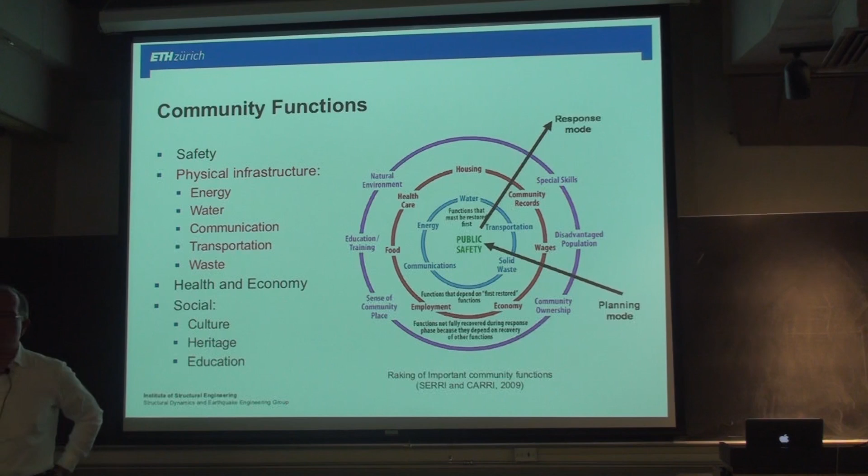But that is one layer surrounded by a few other layers that contain the social and economic life of a community. Here is the one I'm interested in: the layer of infrastructure systems that supply energy, water, communication, transportation, and waste management for our society. This is why we could say that without the functioning of these systems, resilience of a community cannot be realized. These are quite fundamental to the life of a community.

We are going to be facing a situation very soon when we develop these smart systems where, if we're not already doing so, the control and command of such systems is going to be so dependent on telecommunications and computer networks that they're going to be indistinguishable and inseparable. A failure in one may lead to failure in the other, and cascades could happen.

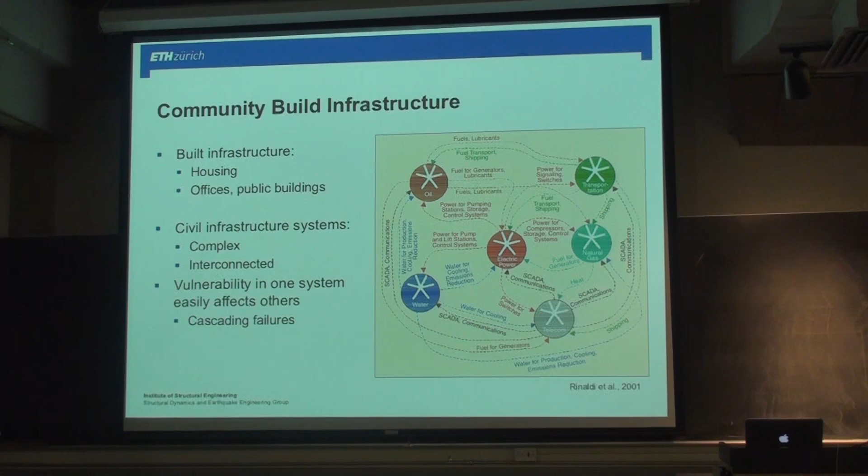This tremendously complicates the engineering of such systems and increases the risk exposure. This is in some sense reality which I think the model I'm going to talk about doesn't yet approach, but at least the hope is that at some point we will be able to deal with a complex system.

This, as far as I know, was first proposed by Michel Bruneau and the folks at MCEER around 2003 or so. Maybe there were some earlier graphs like that.

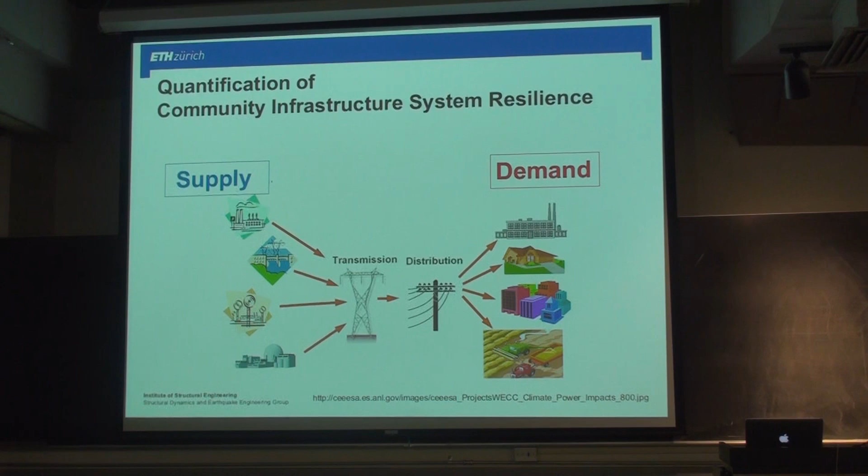So the way I propose to do this is to take the same concept of resilience but separate it into the supply side and the demand side. An infrastructure system that supplies something, electricity for example, will suffer a fairly fast degradation of functionality, then start to recover, probably more slowly. This kind of process we can hopefully monitor and simulate.

And we can do the same for demand. Now the demand comes basically from the people, from the population. What we did is say that demand is somehow proportional to the amount of physical damage to the housing inventory—that includes hospitals, offices, and everything else.

Let's say we have an idea of how damaged the houses are, and with that idea we can speculate how much power they could use, or how much time it would take for people to come back to their dwelling and start consuming power—be it just to charge a cell phone, which is very little, or to use the full facilities of an office, air conditioning, and possibly even a server farm.

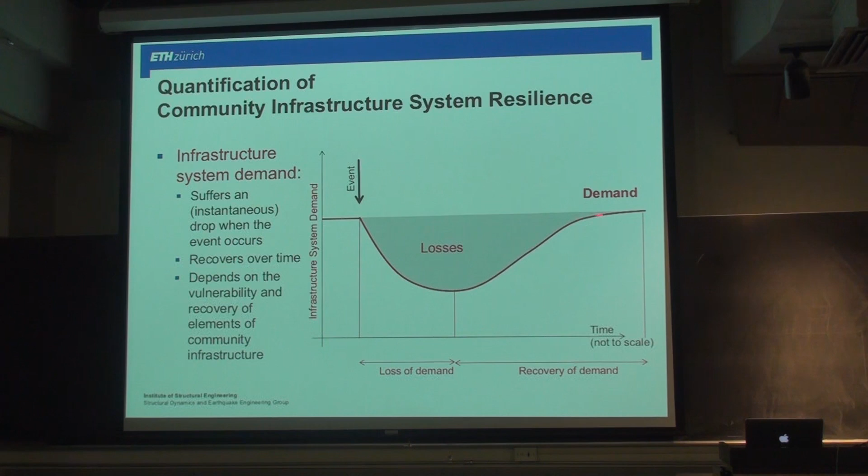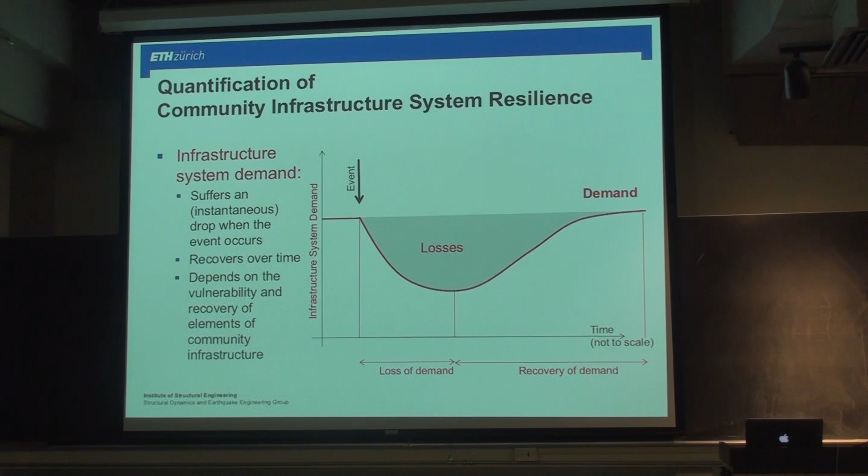So again, there is some kind of drop which possibly lasts longer, and the recovery takes another rate and develops over another time frame from the supply. Overlapping the two, what we can see is that there is a region in time where the supply is not meeting the demand.

The drop in the supply is too severe, the drop in demand is not so severe, and in that sense, the lack of resilience of a civil infrastructure system is exactly that area. Here, in this time interval, the supply system is meeting the demand that the community imposes on it. True enough, it is only half of what it used to be, but the systems are capable of meeting the demand. The rate of recovery of the demand and the rate of recovery of the supply are therefore crucial for understanding this, so it's not only the absolute values of how much drop there was, but also there is a velocity factor, a rate associated with this kind of system.

And so now we can still do the integral. We can still integrate this area and try to devise a system to quantify the lack of resilience that we see here, the situation during time that produces where the system doesn't satisfy the demands from the community.

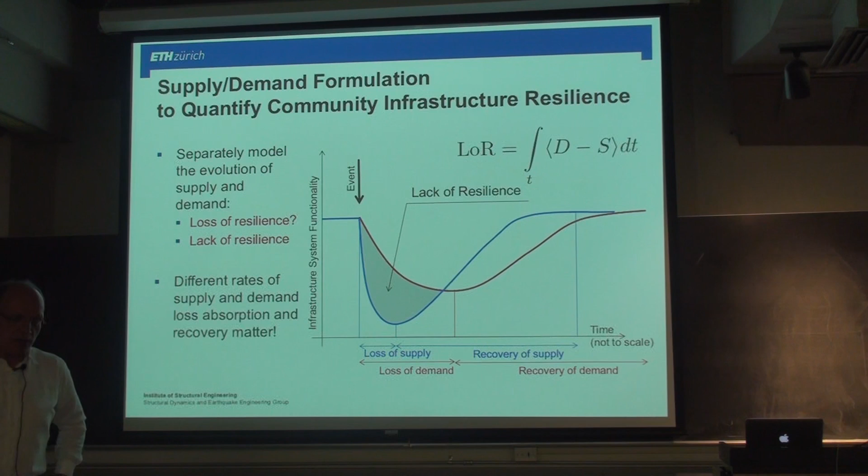This is quite interesting for many reasons, and I'll talk more about why. One advantage is that in many cases we have been faced with the question of how much should we recover. Do we need to adapt? Do we just need to come back to where we were before? What is the right level? Here in this formulation, the right level is only that: you just need to meet the demand, and as things evolve, you keep up. But as soon as you've met the demand, you're not deficient in resiliency anymore. Your system is working.

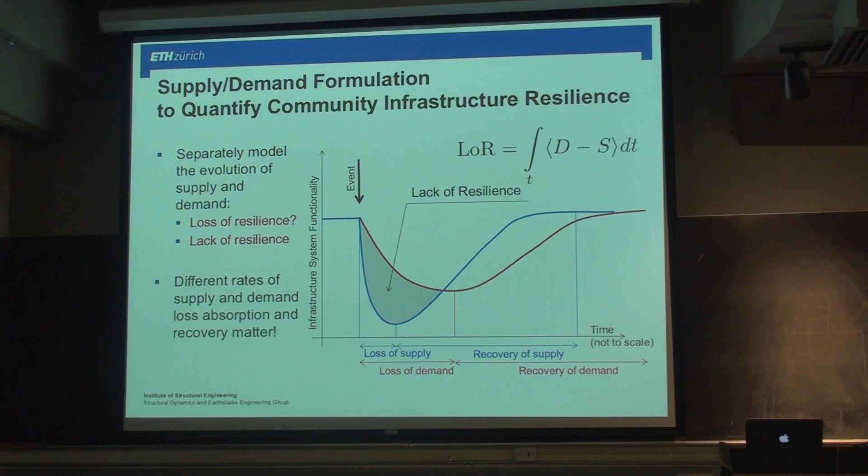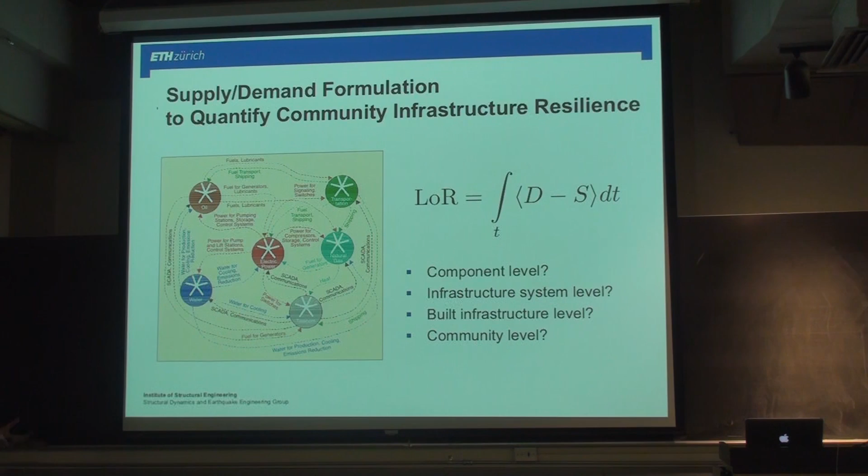So the question then, if this is the definition, if this is the approach, is how do we compute this integral? How do we actually figure out this area, and what do we do to find some numbers? Do we approach the problem at the component level? Do we look at the system level? Do we look at the system of systems level for the entire community? What is the right way to figure this out?

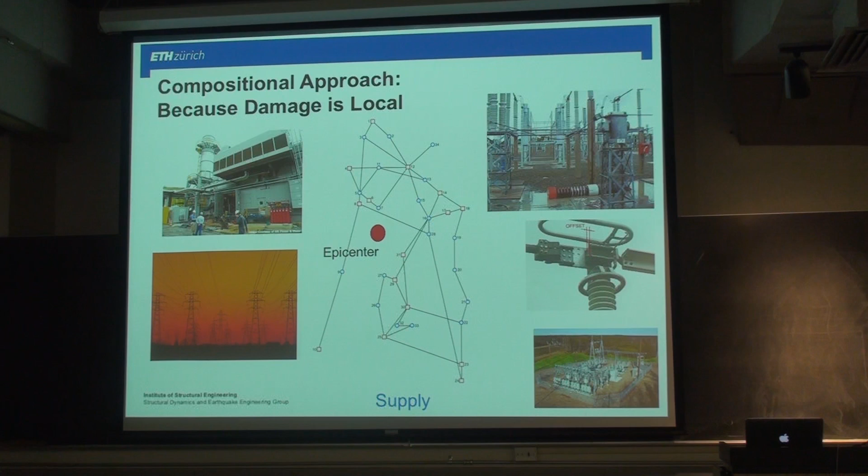In this sense, what we did is go back to the basics, to the PEER performance-based design formulation, where the idea is that everything is local. Damage happens locally, and even though this entire substation was shaken, possibly only one insulator fell. Even though this earthquake was a spatial phenomenon, this piece of equipment is damaged very locally. The same goes for switches and other elements of the power supply system, and similarly, damage to the housing inventory is also local. There are numerous examples where areas of a city are shaken with about the same intensity, and some buildings are standing while others are not.

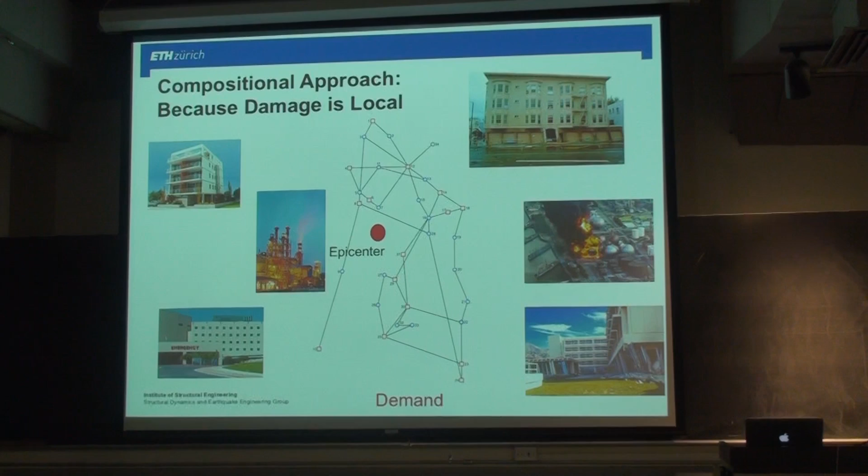We can rely in some sense on local damage evaluation, because we have done this, we have done local damage assessments and local performance assessments within the PEER framework. That is why we fundamentally rely on fragility functions or vulnerability functions to assess the damage that has happened to the infrastructure system and the housing inventory, and then from there compute the lack of supply or the lack of demand. These vulnerability functions, fragility functions, are conditional probabilities. They tell us what is the probability that the damage, the loss of functionality, is higher than a threshold given some intensity of the earthquake.

This is straight out of the standard PEER framework and the standard PEER equation formula. Fortunately, over time, this is not something new. I think it maybe all started with the Vision 2000 document, and then certainly continued through the existence of the NSF PEER Center, and keeps going through the PEER Center's development and cataloging of new and existing fragility functions. Here in the US, the HAZUS people do this, and in Europe there's the Global Earthquake Model people in Pavia who do this cataloging. In general, these days there is a high probability that for pretty much any type of equipment, substation, or house anywhere, one can find a competent, trustworthy enough fragility function to use to assess damage and vulnerability of the system.

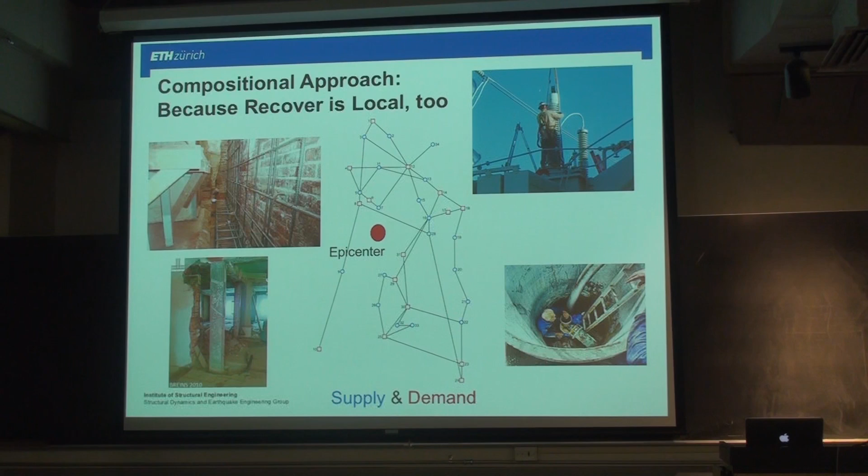There are a few listed in HAZUS that have been ported over from ATC-13, or recently developed a bit further, but very few such functions exist. This is one relatively simple challenge we can address immediately, in the sense that once we make vulnerability functions and figure out the fragility of a piece of infrastructure, we should try to assess the repairs. We should plot out how much time, what the cost is, what the people effort is, how many crews one needs to affect the repair of a damaged piece of infrastructure.

These recovery functions will need to, in this framework, look very much like the inverse of the vulnerability function. There are also conditional probabilities, this time conditioned on the level of damage, that give a probability that functionality will be restored, but there is a time parameter, a duration parameter measured from the moment the event occurred. So we will have families of recovery functions parameterized by the amount of time that passed and the amount of time available to affect the repairs.

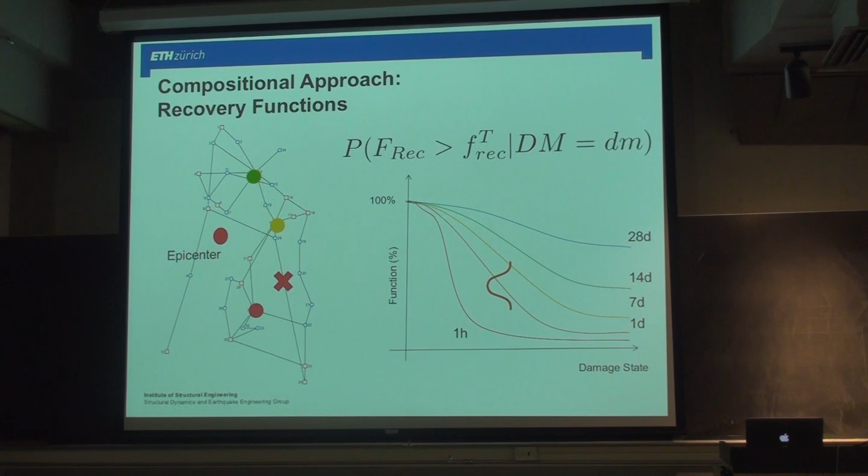After a very long time, the hope is that we will have repaired everything, so the probability of functionality will be very high. But after a few hours or days, the probability of a piece of infrastructure coming back to full function is relatively low. The mathematical form of both vulnerability and recovery functions could be a log-normal cumulative distribution function. But also at Stanford, there was a recent PhD thesis by David Lallemant, where he and Anne Kiremidjian used Weibull functions, which have also been fairly successful, with some advantages to using that kind of probability distribution.

So working on the local level is okay, but there is one more thing we have to take into account: the functionality, the operation of the system. We are dealing with a system. Even if it's a system of houses, it is still somehow interconnected, but definitely so for an infrastructure system. An infrastructure system, and this example is again the electrical power system, has several components: generation, transmission, transformation, distribution, and in the end consumption.

These follow certain physics. One must balance power in the system. There is a voltage balance that must exist. One cannot let infinitely large currents run through it, or everything will burn. One has to look at the availability of particular sources and particular consumers during the dispatch operation.

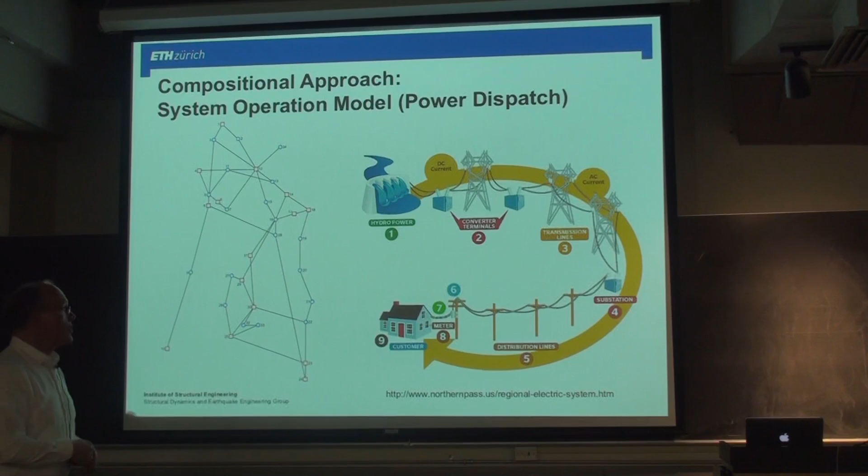And the companies that do this for money definitely do it with respect to some kind of cost. There is a concept of economic dispatch that people have developed, especially now with different sources of green power, less green power, and very dirty power, and different pricing systems. So normal dispatch is something on which the IEEE and electric power people have books and journals—this is a known problem.

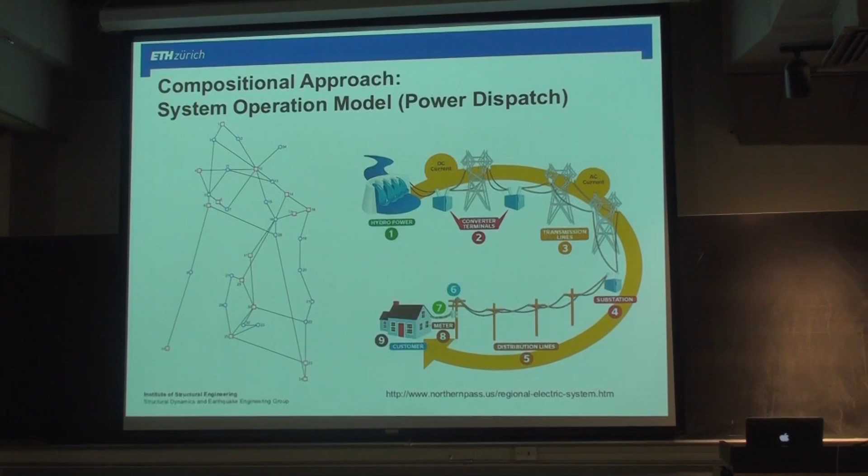A somewhat less known problem, but not that different, is the emergency dispatch, the one that happens when there is damage. In those situations, the electric power company faces a dilemma: should they be making money, or should they supply power where it's most needed for recovery? Sometimes they choose to supply the Google disk drive plant, because this is a sure paying customer, instead of the hospital.

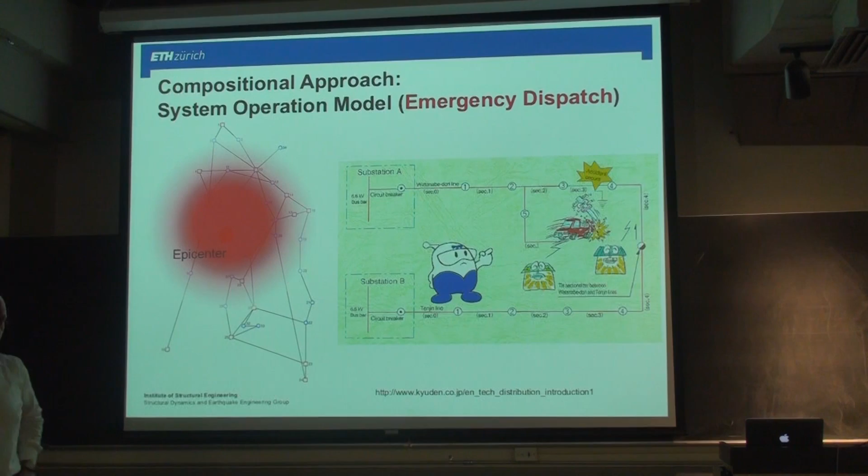And this is something where we could possibly intervene, in terms of choosing the strategy for emergency dispatch. But again, the problem is the same: if there is damage in the network, how do you distribute power? What parts of the network are not going to be accessible? Where are the islands, in some sense, where power is plentiful but the consumers are damaged, or where there are workable homes but simply no transmission, no power, no substation working there, so they cannot be supplied.

So with this kind of model, one that has vulnerability functions and recovery functions at the level of individual components, plus a model of the operation of the system, we were able to run simulations 1, 2, 3... n days after the event, computing generation capacity, available power, and power demand in a hypothetical region.

This is the IEEE 118 network, a piece of that. We assume it's being hit by an earthquake with some distribution of intensities. Some nodes represent generation facilities, some represent distribution facilities, and some are cities where demand is generated, with industrial plants, hospitals, and normal housing.

And this is a relatively complex game. It's not the games you see on your PCs, but it is a hypothetical scenario.

With this scenario, we were able to show that the model based on local computation of vulnerability, local computation of recovery, and system operation, where this emergency dispatch is repeated at every time slice, lets us actually compute the behavior of the system.

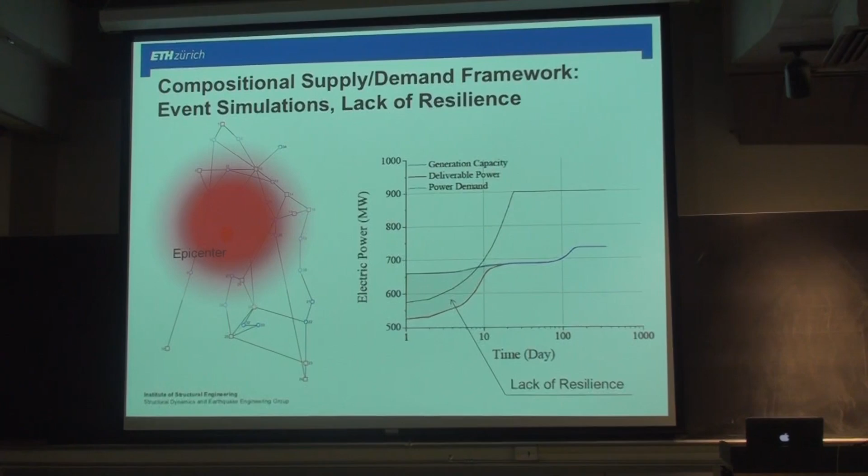In our simulation we let this time run so far, and we deliberately chose somewhat aggressive recovery functions so that we could see this. But overall it looks like the model is working.

We were very lucky — well, these guys were not lucky — but we were lucky that there was an earthquake in Nepal, and there's an equivalent project in Switzerland, like the RAPID projects, where people go take a look at what happened during the earthquake. So we got one of those, and we focused on the electrical power system, water system, and communication system.

Then we went to Nepal. In fact, I went there only once, but a couple of master's students and one of my doctoral students went a few times, and they were able to get as much data as possible about the behavior of the system before, right after the earthquake, and during the recovery process.

Unfortunately, the Nepali system looks like this, and it is really not a beautifully designed system — it's a messy one. The other side of it is that they're not so concerned about state secrets or data protection, so we were able to obtain the data. Nevertheless, it's an exercise in patience, and also an exercise in understanding how things are different in the developing part of the world.

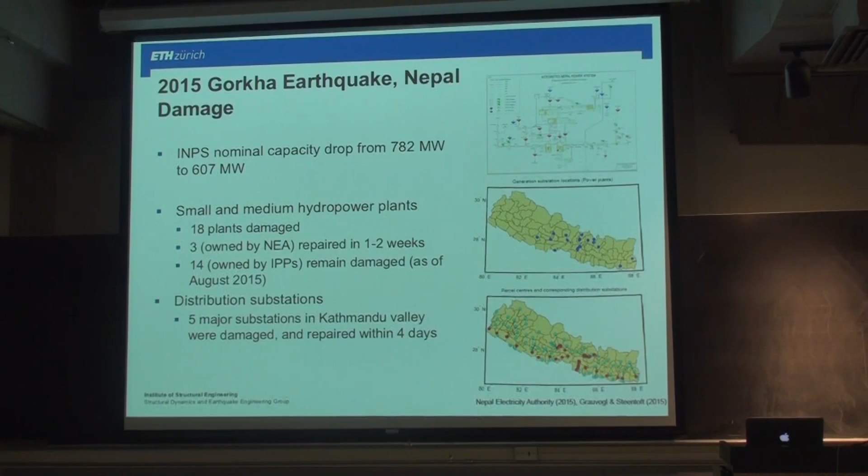There is a continuous deficit. Their technical generation capacity is there, but their losses in the system are very high also.

So this is what the data looks like, and we can discuss whether there is some correlation here or how this evolves. But we see that the original graph of resilience of a system is actually reproducible from the observed data. And not only that, but with our simulation we can get closer. We definitely are not missing by a lot the drop in service of the system.

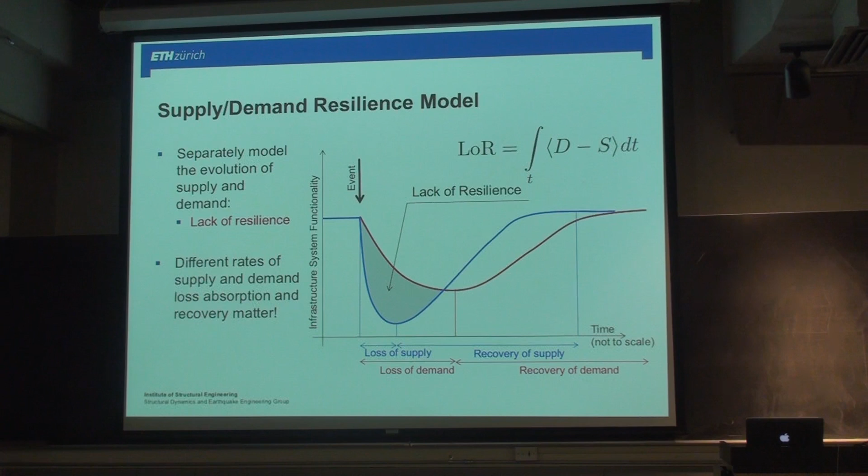So anyways, back to this idea that we are going to model the resilience using this difference between the supply and demand. What I would like to do now is show you how this integral was actually computed in these simulations, and what we did to get a relatively reasonable measure of the lack of resilience.

So at the level of one node in the system, the way that we treated this is by looking at the difference between demand and the available supply. This available supply includes losses in transmission and losses due to the poor performance of the network.

And we look at it from the beginning, when the event happened, until the time that we decide to stop observing the system. The geographic boundary is also included there. There needed to be a circle around Kathmandu beyond which we did not go, and we made that judging by the extent of the network.

And we are using the singularity function so that we are not integrating when the demand is satisfied. We are only integrating in this region when there is not enough supply. So this kind of definition is fine, and we can also normalize it.

The reason why it's important to normalize this quantity is because this integral comes out in units of megawatt hours, which is nice because people compute that in terms of power. But if this is a water system, it would come out in liter hours.

If this is a phone system, it would come out in number of calls made hours. If this is some kind of monetary description of the functioning of the system, it would come out in Nepalese rupee hours, or in dollar hours, or in Swiss franc hours.

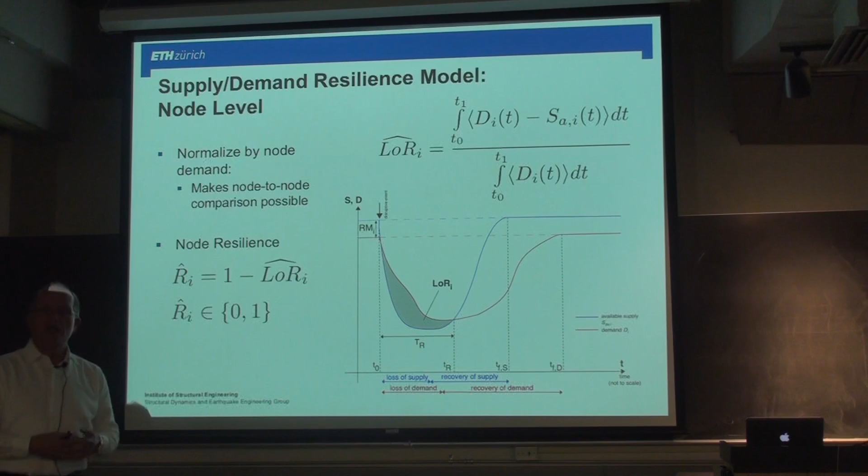Once normalized, we can get into the 0-1 space and obtain a non-dimensional quantity for the measure of resilience and work with it, because then we can compare different nodes. We can compare even different infrastructure systems in terms of their behavior.

But to move from the node level to the system level, there was one big obstacle. We defined the lack of resilience in terms of the available power, available supply. But the available supply is a complicated quantity that depends on the operation of the system. It depends on what is the maximum capacity available, and then we have to take out all the losses that are occurring in the system.

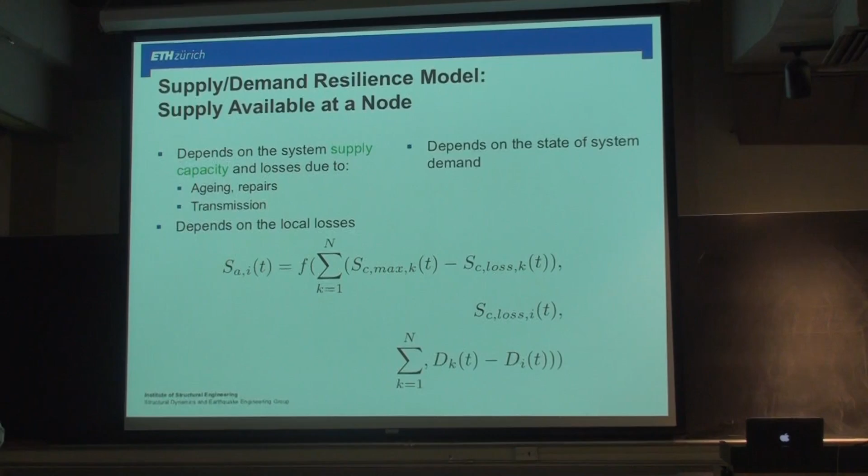It also depends on the demand state, and over time the demand may be higher or lower, and the dispatch may vary. Therefore, some parts of the network that had plenty of power may tomorrow not have enough. And this quantity was a difficult one to deal with.

And the most depressing part is that it is not an additive one. If you take a look at the system level, the available supply at each node, summed up together, does not give you a system-wide available supply because of the many correlations that exist.

The correlations come from the operations model of the system. On the demand side, we assume that the houses are independent of each other, and that if there is power in one house, that person is going to use it regardless of whether there is no power in the other house, and nobody is there.

So there we said, okay, we can do this kind of summation. And this is where we cheated a little bit on the correlations, and if we go a little bit more granular, we can see that there will be correlations among the behavior of different apartments in the same house, for example.

This comes back down to, for example, the ATC 58 kind of calculation of business interruption or losses in a building where the correlation between different floors exists, and the same would then occur for the correlation in power demand on different floors. So we simplified a little bit here.

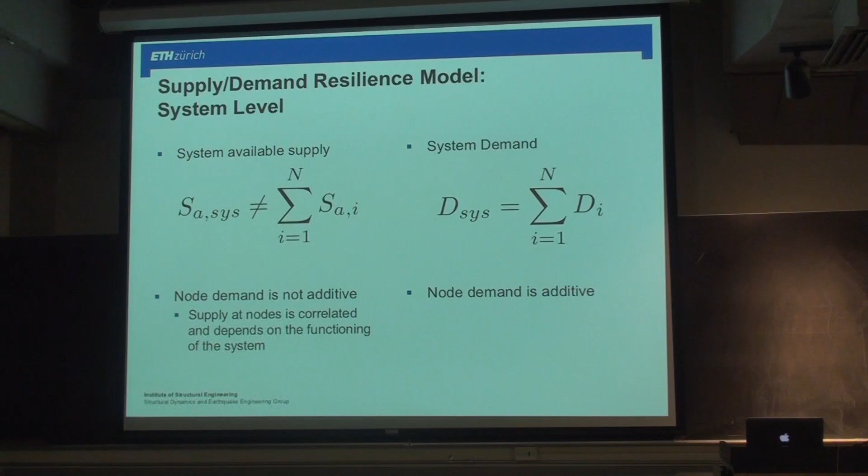Bottom line is that the lack of resilience at the system level cannot be computed just by simply summing the lack of resilience at every node. There needs to be a more complicated sum that takes into account these correlations and network operations.

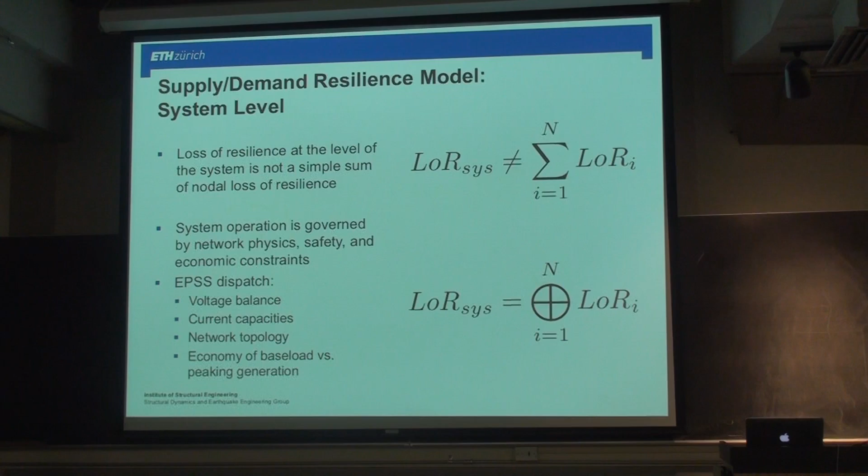So to be able to move on in these simulations, what we did is we defined the quantity of consumption, which is basically what a distribution node takes. Is it the demand or is it the available supply? And whatever this node has, it is going to give out.

So if the demand is smaller than the available supply, the consumption will be the demand. If the available supply is less than the demand, they will consume as much as they can, and that will be the consumption of the node.

And this, we said, is uncorrelated, one node to the other, and therefore we were able to sum it up across the network and obtain this kind of curve that bounds the graph from the bottom as the consumption, and based on that we can compute the resilience of one node,

which happens to be exactly the same as the old formula for the resilience of the node. And then we can also move to the system level, summing up what the nodes are doing and basically making a difference on the system level of the available demand, of the generated demand, of the present demand, and the possible consumption in the system.

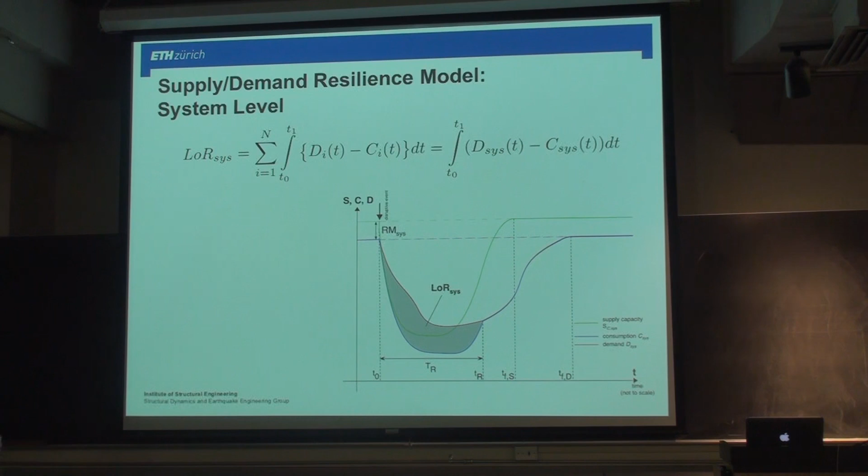And here again we can obtain similar looking graphs where we see that the consumption cannot be met. The desire to consume electricity is there, but we simply do not have enough supply. And we can, in the same way, normalize this quantity on the system level by looking at the system level demand and obtain a normalized measure of this area of the graph that represents somehow the behavior of the system.

And this is all fine and nice, and to make all these Monte Carlo simulations run, my students made a bunch of software and they developed kind of an algorithm where we first look at the supply nodes, the node level, we look at the system level. Here is the network functioning model, some kind of electric power dispatch.

Then we look at the distribution nodes, we compare the demand to the available power at each node, including the losses in transmission and the losses due to the inefficiencies of the system, and then compute the consumption, and on the basis of this we figure out if there is lack of resilience or not.

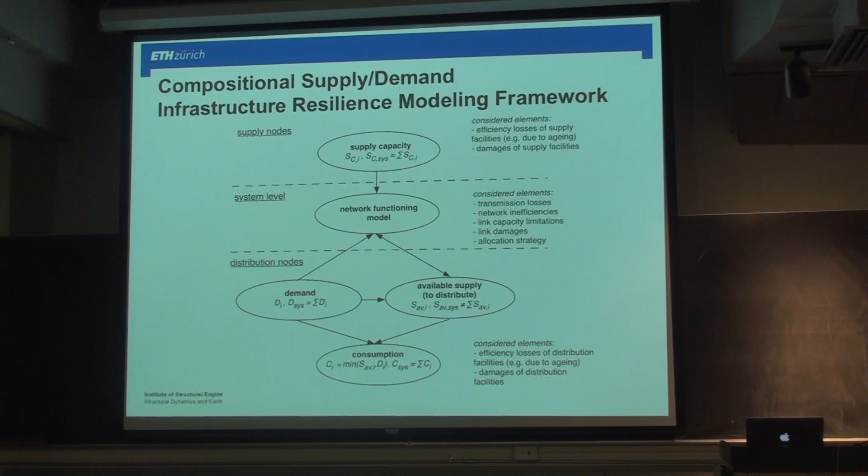This is repeated over time during one event and then generated for many events to conduct Monte Carlo type simulations. The results are not exactly matching the Nepalese data, but are making sense, and therefore we continue to use this approach.

What we find very interesting is that this formulation is quite capable of representing pathological cases. This one is not so pathological: in Nepal there was an aftershock, and in this kind of formulation we can see that after an aftershock there will be another period where the supply lags behind the demand.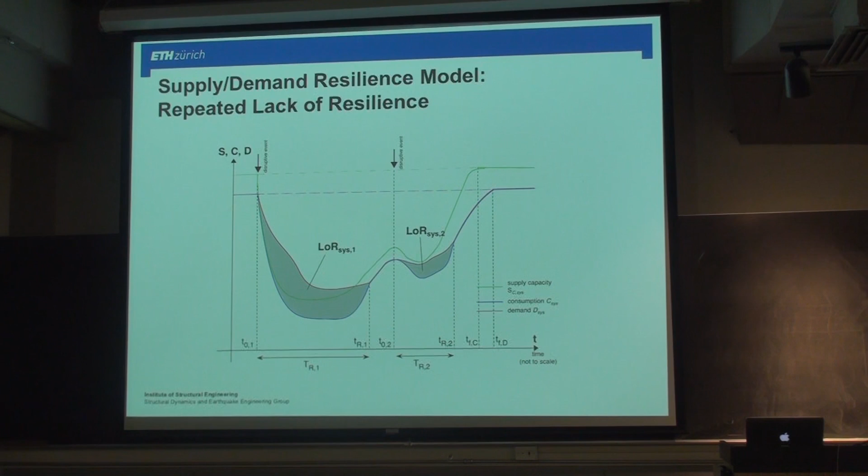And the integral that I showed you between T0 and T1 can actually compute the sum of these two areas and declare that as the total loss of resilience of the system.

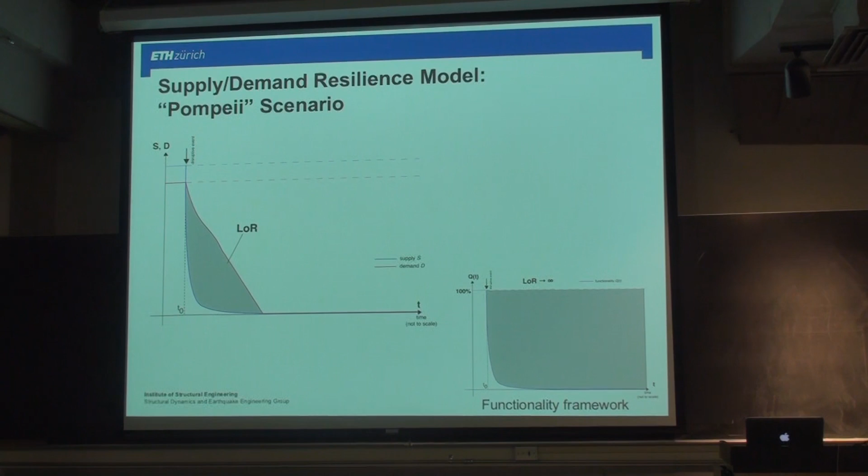Then there are more pathological scenarios. This is the Pompeii scenario, where we have a very severe drop in supply and a somewhat more gradual, although that's questionable, drop in demand before people actually leave the place, and then we have nothing - it's just abandoned. In the framework that we have, we can compute some finite measure of lack of resilience, whereas in the functional framework, where one just takes a look at the area under the curve, the loss of resilience would be infinite here.

There is another interesting scenario, the one of Port of Kobe. In 1995 they had a pretty big earthquake and the port was significantly damaged, and then they took several years to repair it. In the meantime, the Japanese auto industry continued to function, and all of the transports of cars from the Kobe area were moved to Osaka. So they had a very beautiful port that could supply even the previous level of loading, but they had no demand because there were no ships coming to it.

The situation has changed, hopefully - I don't know exactly what it is today, but this is Stephanie Chang's data from about 2010 or earlier. So this is the situation they have there, and the functionality framework does not show this as an option. It doesn't - the framework is somewhat limited and cannot show this situation.

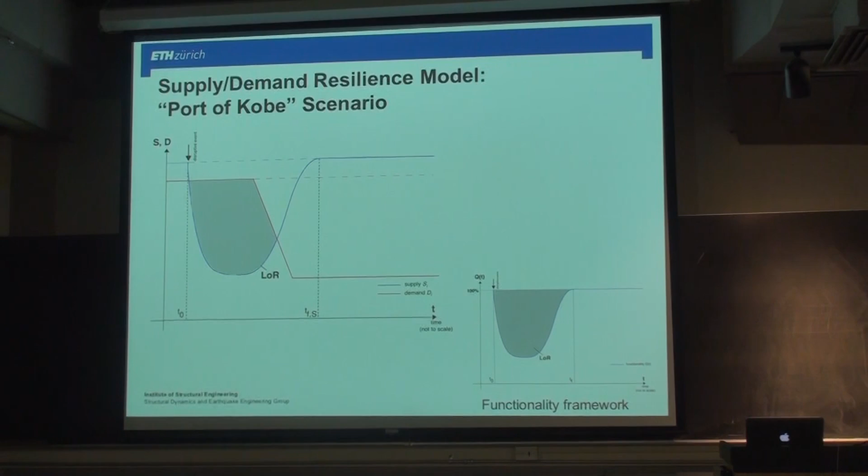And then there is this thing - this is a cellular network example. The cellular network is a good one, and therefore during the earthquake it doesn't get damaged at all. But what happens is that everybody's mother wants to call you, and there is a huge amount of calls that is generated, call demand, and this cannot be met with the current state of the network.

There is some reserve, but it is a normal reserve, not the emergency reserve, and therefore there is a lack of resilience. And it may affect us, because maybe one of us will need to call 911 and would not be able to do so.

So this is an interesting graph that the functional framework will just not see at all, and we can see that there will be a lack of resilience - even though there is no damage, there is no change in supply, there is only an increase in demand for reasons other than structural failures.

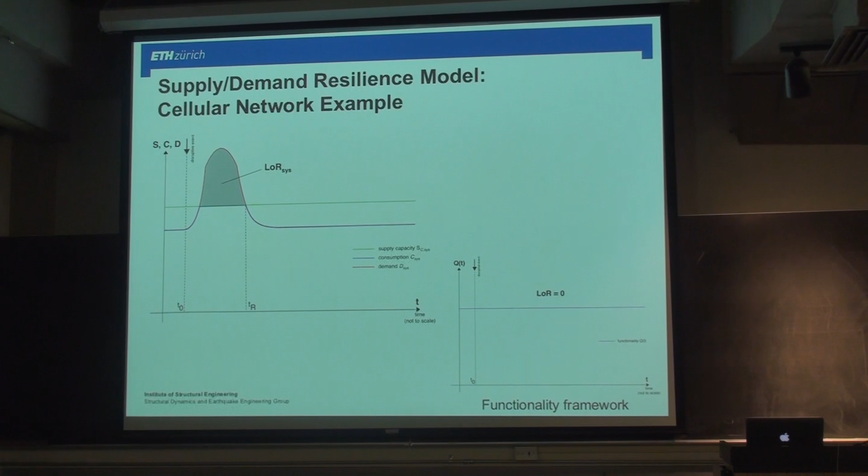So it's nice to know that this can be done. Another thing I didn't talk about at all, which probably requires another whole talk, is the probabilistic formulation of lack of resilience, because all of this is done by Monte Carlo simulations. If we adopt certain functional forms for the vulnerability and recovery functions, and if the network model is relatively simple, we could integrate it in closed form too.

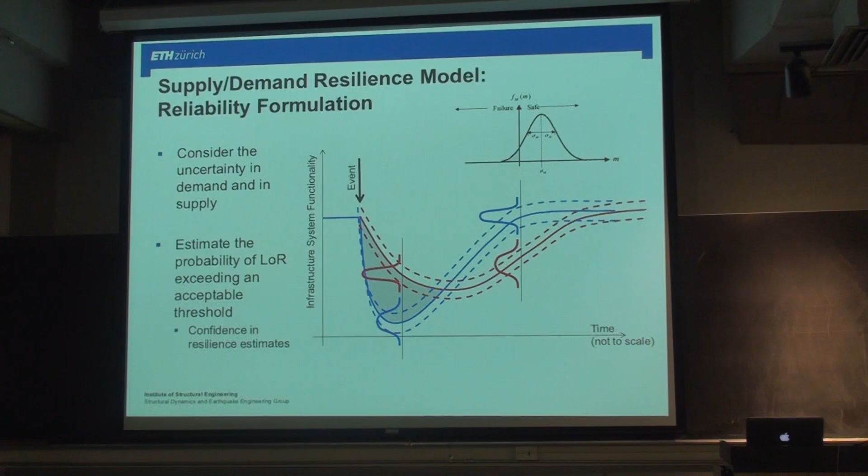We could obtain at every point in time the distribution of supply and the distribution of demand. We could look at the reliability issue and statements that we want to have certain confidence that the lack of supply is going to be smaller than this, and that the time of recovery is going to be faster than that. So a probabilistic formulation follows fairly naturally from this system.

Another thing we can do is not measure the integral, not produce integral measures of resilience, but look at instantaneous measures - at a certain point in time, try to quantify how much the system is underperforming.

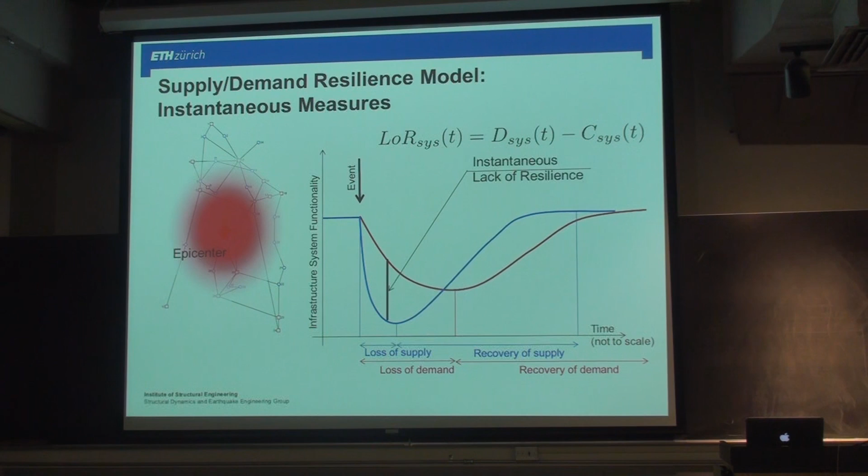Measures like this are not terribly difficult to compute, and they could have nice social or useful interpretations. The one here is the percentage of the population in this region that have no power 1, 2, 3, 4, 10 days after the quake. So here we get 35% for a fairly large earthquake. Is it right or not? I don't know.

But the question is that somebody from the city of Berkeley, somebody who does public policy for this region, can say no more than 30. Let's see what we need to do so that we don't go above it. And what is the probability that we will go above some threshold? We also see that the supply, the system recovers very quickly, and using Western style recovery functions, we're basically done with the event 10 days later.

Here is another one where the percentage of people without power is correlated to the magnitude of the earthquake. And here we can also put a threshold, say 15% is what we can take, and then for these larger earthquakes, for the earthquake magnitude, we can fairly easily translate into the requirement for base shear, basically the strength of buildings, and then come up with design objectives such that a certain percentage of people without power 24 hours after the earthquake is not exceeded, given a certain magnitude with a certain probability associated with it.

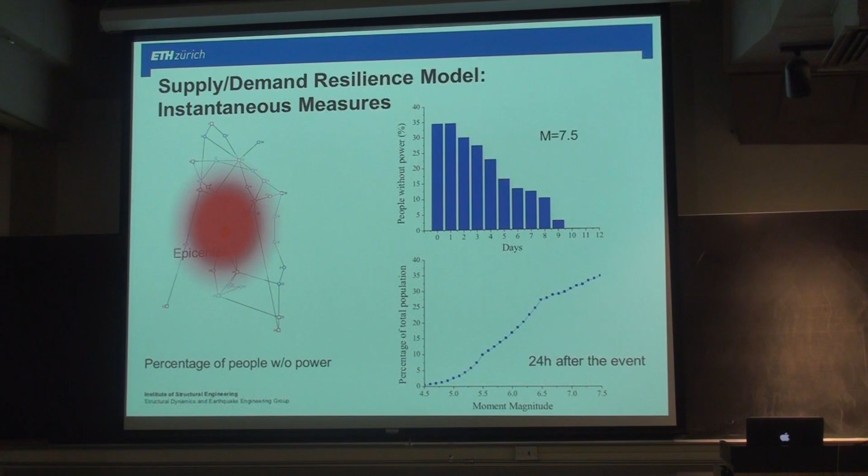So we can formulate a standard performance-based design assignment based on this. The model comprises vulnerability and recovery functions for both the supply side and the demand side, and contains a system operation model that takes care of production, delivery, and fulfillment of demand in both normal and emergency situations. This framework is something that we developed and applied to the electrical power system.

There is a couple of guys who did this for a fictitious water system. Now one student is doing this for the actual Kathmandu water system. And we had a couple of people look at the fictitious communication system, and one of the students, Salome, is now looking at the cellular network in Kathmandu. So we will see how close or far they will get.

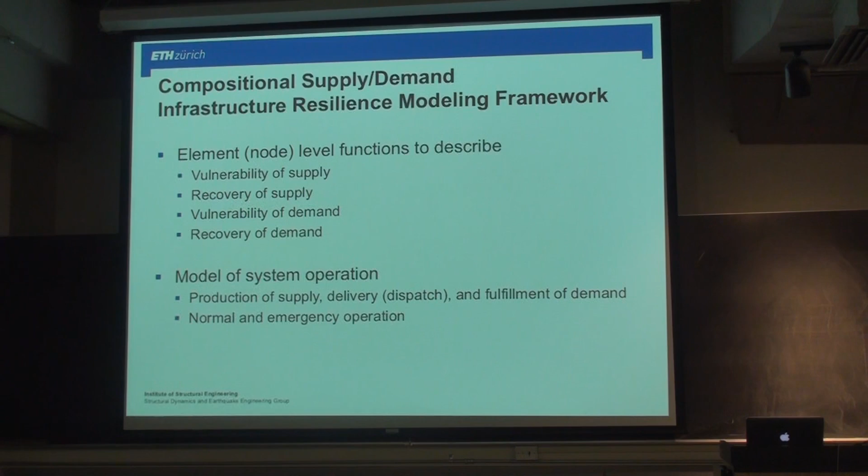But this framework is something that I wanted to present, and I think it's relatively good, and it would be great if more of us could try something like this so that we can see whether it operates on different systems and what could be improved in it.

And certainly it is complicated, and it requires this system functionality description that we don't need for single elements of the inventory. But because now the electrical power system is working together as one big machine, we need this kind of functionality model, operations model. We didn't take a look at many of the interactions, we only took a look at a few, but certainly there are a lot of interactions and correlations.

Nevertheless, the model is relatively transparent. One can see what is going on. It scales up and down relatively easily. Most important, it disaggregates. We are able to find out the cause of the largest loss of resilience, the most important cause, or the second most important one, and therefore prioritize our work.

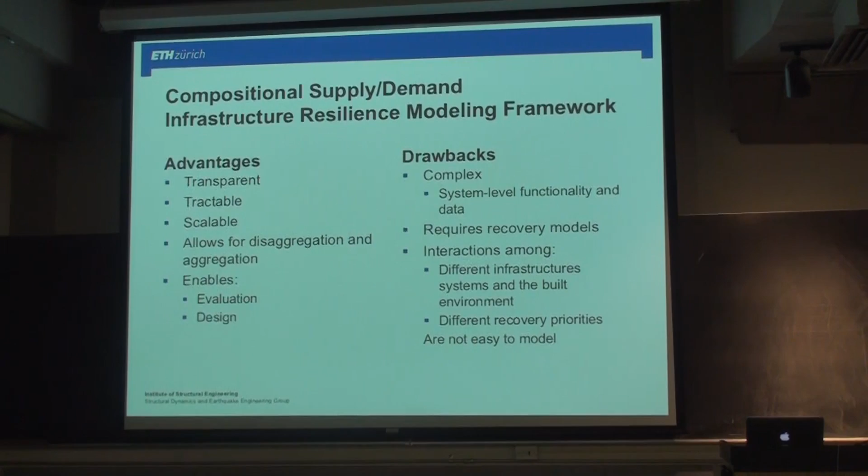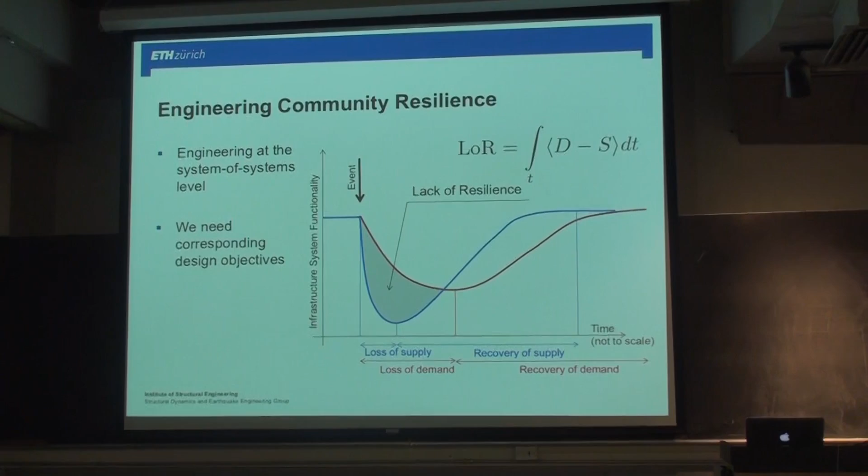So when it comes to engineering community resilience, my suggestion is that we continue using this model and to engineer at the level of the system of systems, to look at the community all the time, and descend to single elements of the inventory, houses or substations, only at the very last step of the design process. We have to start the design process at the level of a community.

And what are then the goals that we should fulfill? We should provide the means to reduce the vulnerability before the event. We should provide the means for rapid recovery. And we should try to promote risk reduction. And all these things are associated with money.

This comes from Swiss Re, who are the reinsurance company, and they look at the amount of potential exposure of a community and say, how could money that the community has be spent most efficiently to reduce the vulnerability?

Some part of that fund money could be used for cost-effective engineering risk reduction, basically retrofitting or building better new buildings. Some of the loss could be bearable, and by public policy means it could be reduced significantly. And some of the loss may not be bearable. We may need to generate additional investment to be able to go through the recovery process.

During the recovery process, we are spending a lot of resources, therefore we need money. The insurance industry suggests that this can be covered by financial tools, such as earthquake insurance, catastrophe bonds, or other financial tools.

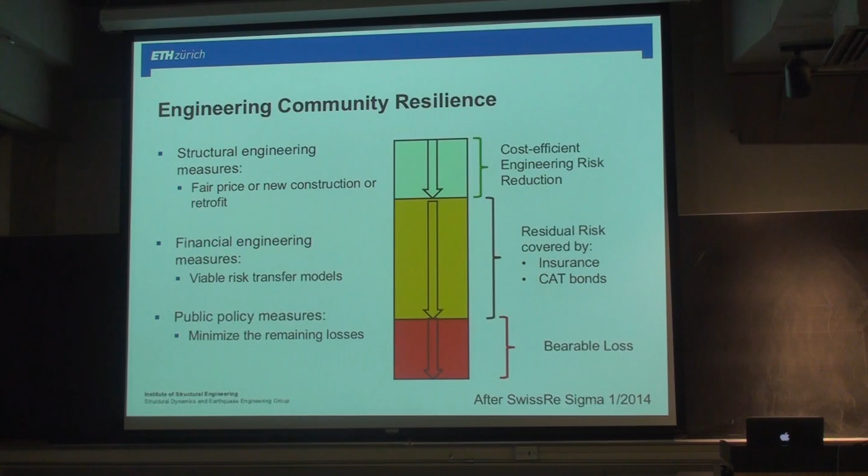The role, the way that I see it, if we engineer at this system of systems level, there are very good incentives for the structural and the financial engineers to collaborate. The public policy people, we need to talk with them, but possibly after we discuss with the financial engineers what is the optimal mix of financial and structural measures.

How much of the current wealth that I have should I put in retrofitting? How much should I invest in a financial tool, for example, buy earthquake insurance? This has to do with the time horizon of ownership, the fair price of a retrofit, and the use of value at risk models and expected shortfall models, which is something we are still looking at to see how to optimize.

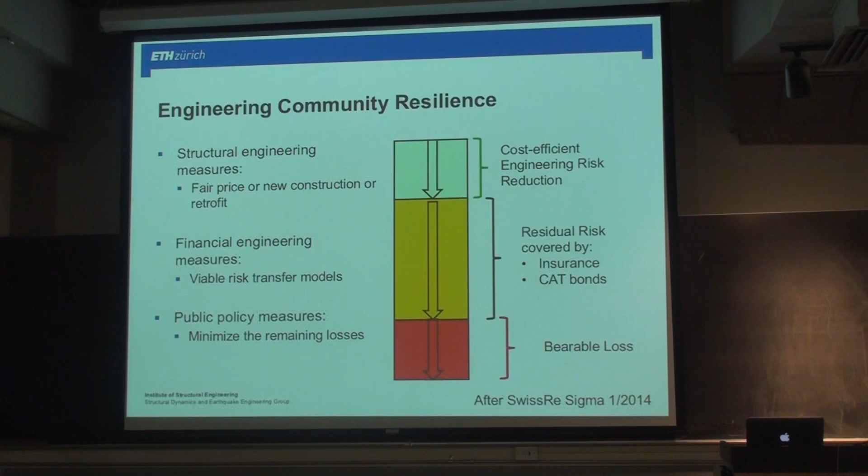So to me, this link to the financial resource systems is very important, and I think it's something we are going to work on very hard.

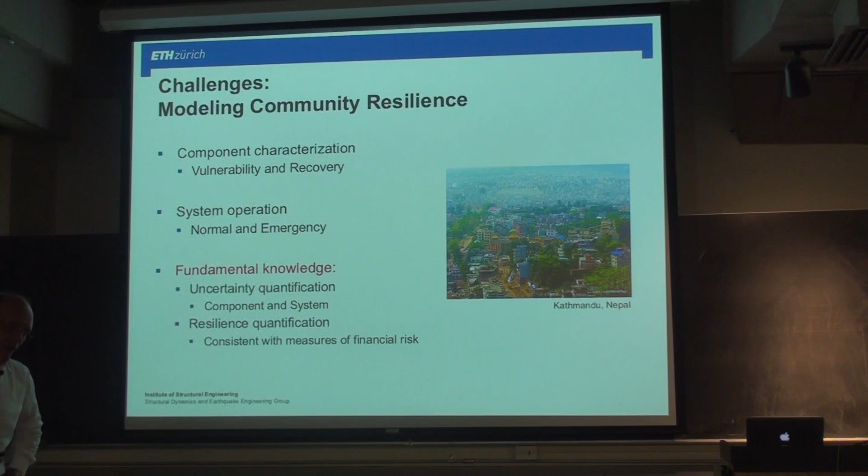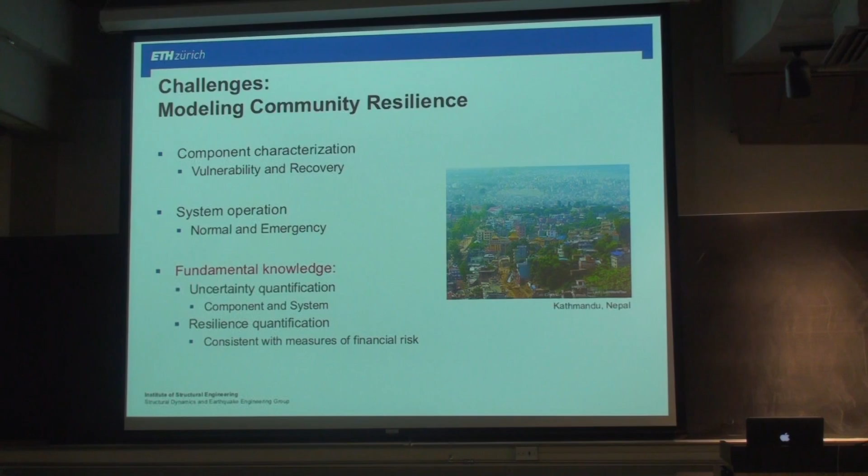But still, there are challenges in this modeling - one significant challenge is we need to look at the system operation and the component characterization. But much more important, in terms of fundamental knowledge, we need to continue to quantify resilience better. There is a lot of uncertainty in the system, and we need to devote a lot of energy to quantifying the uncertainties. We should not be approaching financial people and public policy people with deterministic statements - we have to have a very good idea about the uncertainty structure of the problem.

From the structural standpoint, probably a good thing to do is to compute a fair price of an effective increase in robustness. From the financial standpoint, they need to try to develop new tools for financial risk transfer, not only insurance, not only catastrophe bonds. There are probably other things that could be done, better suited for one community than another, and this portfolio of tools needs to be developed so we can optimize the diversification and redundancy of our system.

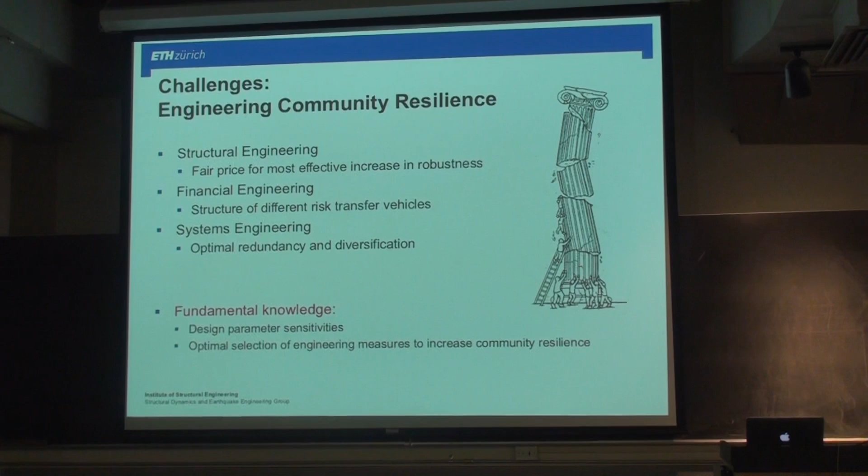Again, on the fundamental knowledge level, we need to find out what parameters we are dealing with so that we can affect some design loops, and start to think about how to design and engineer a resilient community. So there is quite a bit of work ahead, not only in structures and finance, but also in preparedness, education, urban planning, and public policy issues.

The one thing I would like to conclude with is that as the risk is growing in our communities, and especially here in the Bay Area, we see investments from venture capitalists in all kinds of startups. What I would like to say is that as our risk is growing, the investment in risk governance should be at least equal to the intensity of the investment in innovation.

If we are innovating without managing our risk, this innovation is at an even higher and growing risk, and so somehow we have to alert the people who invest in startups that they also have to do risk governance and engineer resilient communities - one way or the other, maybe using this model, maybe using something else, it doesn't really matter - it should be one of the top priorities that goes hand in hand with all the phenomenal stuff the techie guys here are doing.